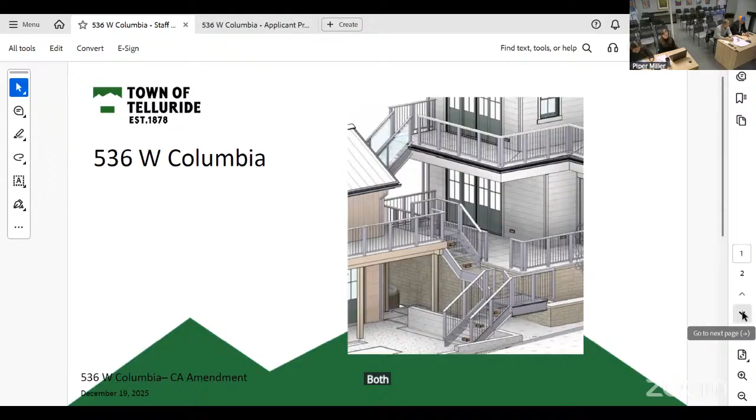Project history and proposal: On July 31st, 2023, a CA was issued for a small-scale demolition and new construction at 536 West Columbia. On September 25th, 2024, CA Amendment Number 1 was issued for changes to the lighting plan, window layout, and exterior stairs on the southeast corner deck.

March 31st, 2025, CA Amendment Number 2 was issued for an addition of a hot tub between the garage and the rear deck. The current proposal for CA Amendment Number 3 proposes design and construction updates to the rear stairs and deck system, as well as a front deck extension.

Staff recommendation: Staff finds that the reconfiguration of the stairs, along with the connection between the upper level deck and the secondary structure, is not in compliance with the design guidelines. The proposed changes increase the perceived mass and scale.

These changes are also incompatible with what would have been found historically in this treatment area. Staff are also concerned that the proposal changes the utilitarian character of the secondary structure with further connection to the primary. Therefore, staff recommends continuing the application to allow for compatible revisions.

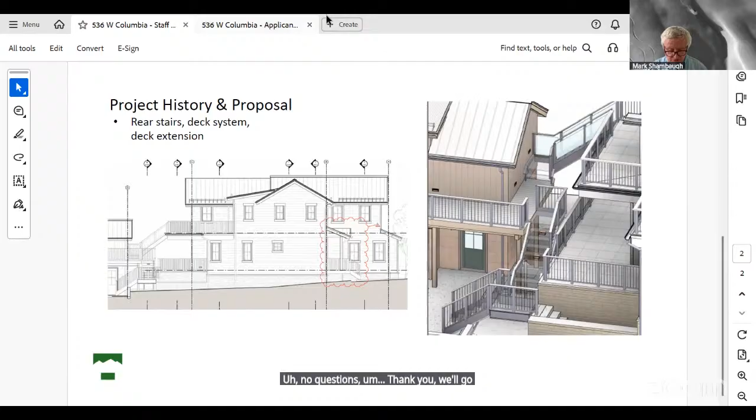Great, thanks so much. Dylan Henderson, Salt Architecture. Ben Jackson, owner, developer. So the first one, I think, is fairly easy.

The original approved HARC plan had a 4-foot front deck. The owner asked for a 2-foot extension so that we could get more usable space, possibly planters, things like that, so that they just had more circulation on that front deck, and staff recommended approval on that. So I don't have any comments on that, but if you have questions, happy to answer them.

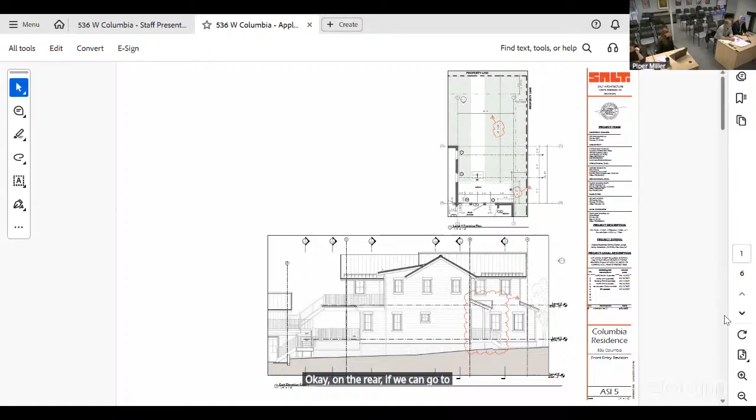I'm good, go ahead. Okay, on the rear, if we can go to the next page please. So currently, the way that this stair is configured and approved is that we circulate from the driveway up onto the rear deck, and then there's a stair that's approved from the rear deck up to the garage unit.

So really, this is a reconfiguration from the driveway to the rear garage structure, where we're not forcing the people who live in the house to circulate onto the master bedroom deck to get up to the garage. And then there's this extension from the garage to the upper level. The upper level is where the living room is. And so this connection allows for two different things to happen.

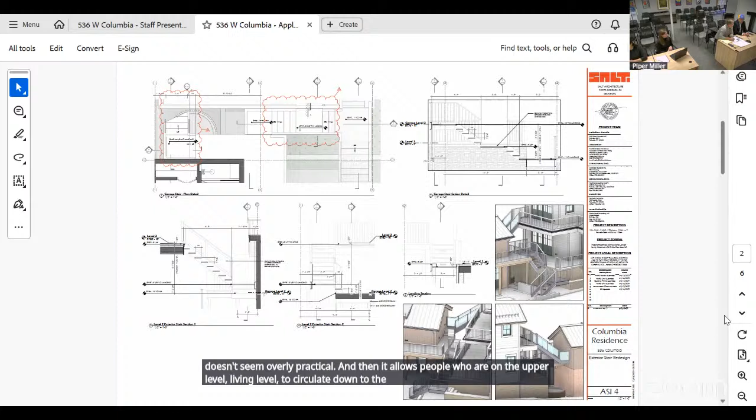One, when you circulate from the driveway and garage area, you don't have to pass through the lower bedrooms on the lower floor to get up to the living level. We feel that's very important for ease of access to this house — forcing people to circulate either up the side yard, which will be full of snow in winter, or through a bedroom doesn't seem practical. This also allows people on the upper living level to circulate down to the garage unit or to the hot tub without passing through the two rear bedrooms.

If you go to the next slide.

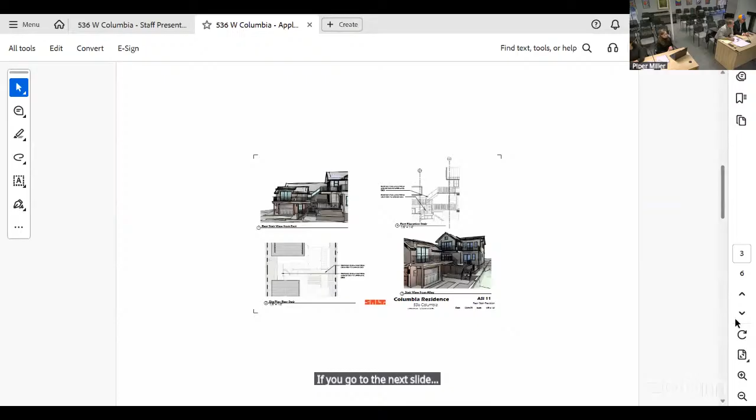This was a presentation offered to both neighbors on the east and west side, and we have two approval letters — one from James Liu and one from Robert Schmidt, who are the east and west neighbors of this property.

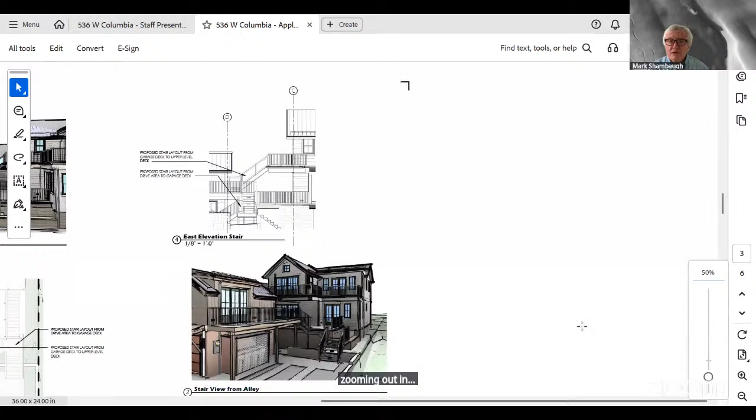Can you blow those up for me? Zoom in. I read the letters, but go ahead. Okay, so we have approval from both neighbors.

The west neighbor will be the most impacted, and we got approval from him. The perceived connection between the garage and the upper level will only be seen by the western neighbor — you don't have the ability to perceive it walking down the alley. The image in the lower right corner shows there's no visible public view of this connection stair. The impact is only to the western neighbor, who supports this.

It allows us reasonable access between the upper level of the house and the parking area and hot tub. James will see it from the east — you can see it in that upper left photo. He'll be in his backyard, but I spoke with James about it and he's okay with it.

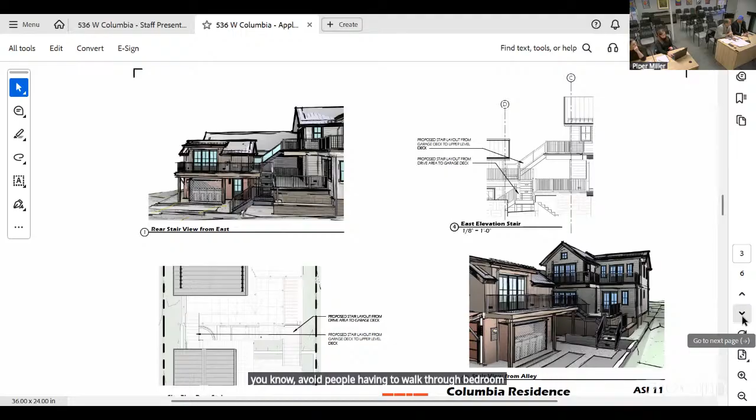We also have some examples we sent — these bridge connectors are very common in historical mining towns. We had examples of those, as well as a couple of houses that have them. This is really just to avoid people having to walk through bedrooms to get through circulation, like Dylan said. But if walking down the alley, you won't be able to see that view.

Darren, if you can go to the two photos we shared with you. Let's finish this one first, then go to the next page. Oh, these are just the letters you said you read. Yeah, if you show those two images, Darren, that'd be great.